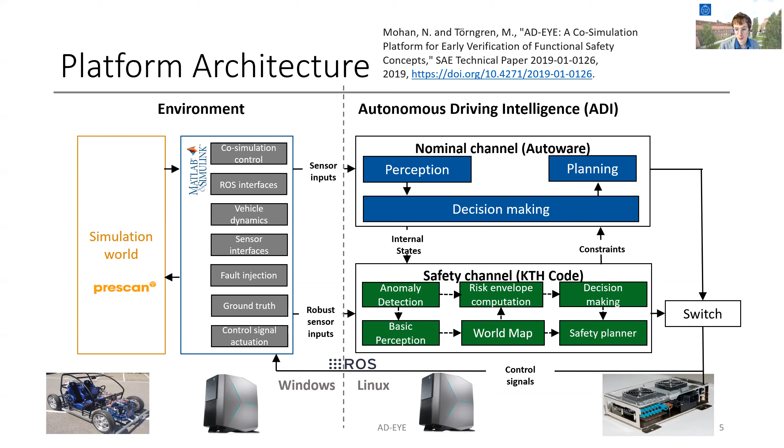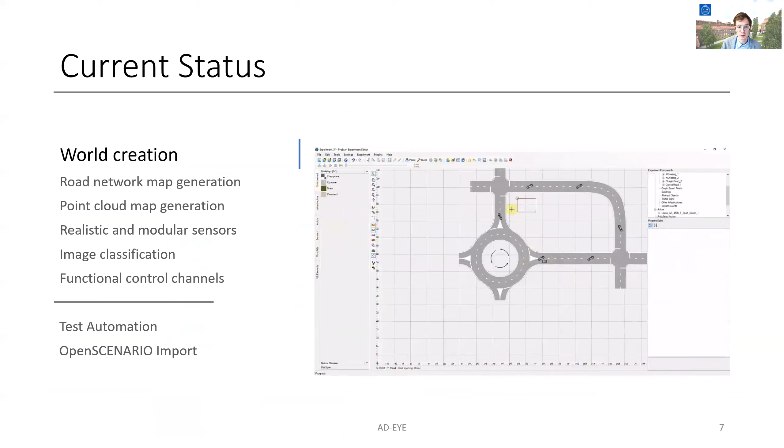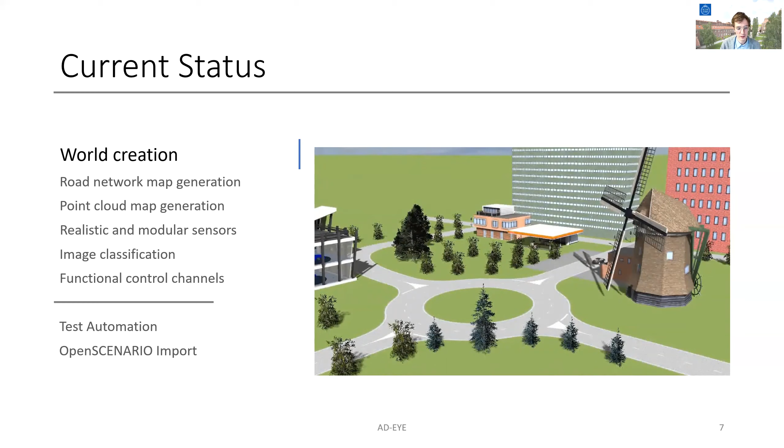With AD-EYE, we can create simulation worlds. The first way to create a world is to do it manually, as seen in the video, by dragging and dropping elements. This is an easy and intuitive way to create simulation worlds and scenarios and allows to prototype quite fast. The alternative, more automated, is to import simulation worlds.

As we can see here with a KTH campus that was imported from OpenStreetMap. So the left picture is the map in OpenStreetMap and the right picture is a simulation world as we can see it in our simulation software.

This more automated way of creating simulation worlds is more scalable, as we can generate hundreds of simulation worlds by doing so programmatically. Once those worlds are imported, they can also be manually modified and improved to get closer to reality, as we can see here with improved buildings and textures for KTH campus.

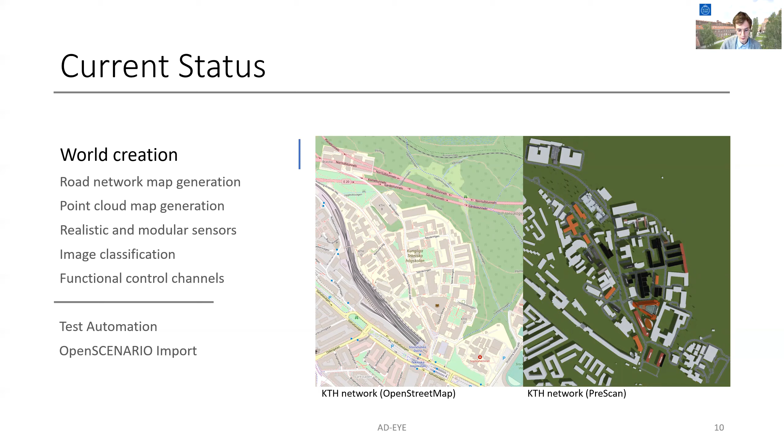Once the simulation world is created, using AD-EYE, we can programmatically generate two kinds of map. The first one, road network map, is a map used for navigation. So using AD-EYE, we can create this map in a known format, and it contains all the data useful for navigation, such as lanes position, direction, traffic signs, and traffic lights, and other. So this is one layer of map, and the other one is point cloud map.

The point cloud map is a set of points in three-dimensional space that is used for localization. This one can also be generated using the AD-EYE platform from the simulation worlds or from the real world, as we can see in this video, where the map of KTH campus is being recreated. Those two layers of maps are the only a priori knowledge that is given to the autonomous driving intelligence.

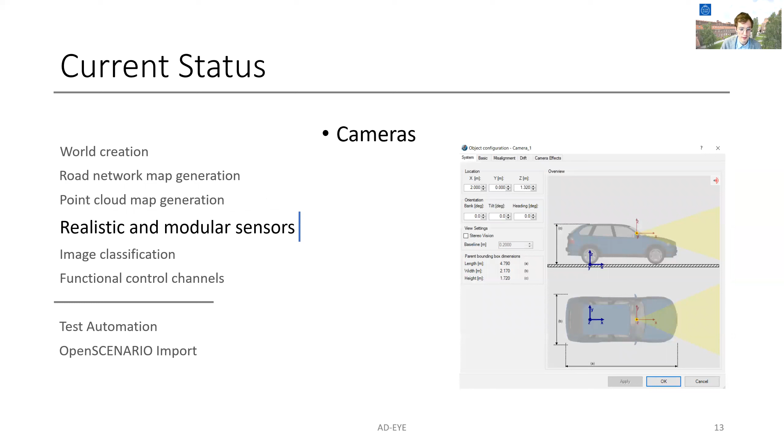The AD-EYE platform has support for several sensors, such as cameras, radar, and LiDARs. We have worked on image classification, and AD-EYE allows to generate big data sets using simulations, and we have used those to train a neural network to assign tags to detected objects.

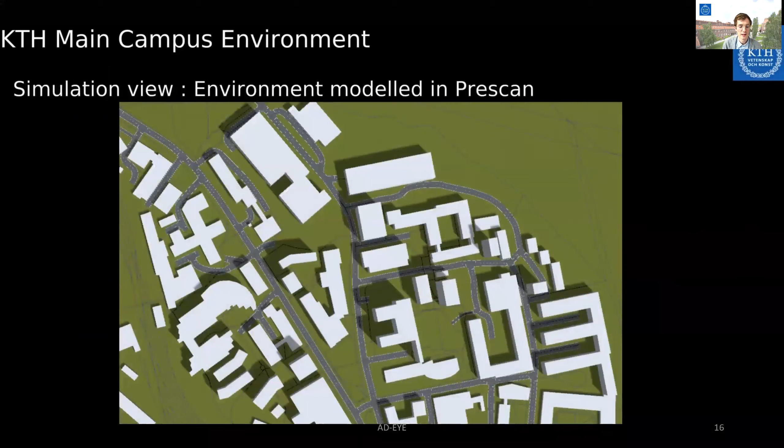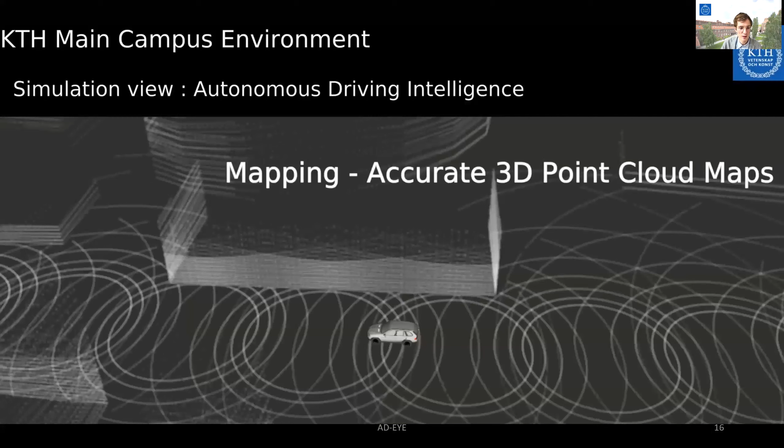We saw in the architecture that AD-EYE, and more specifically the autonomous driving intelligence, was composed of two independent control channels. In the following video, we are going to see how those two channels interact together and how to go from the creation of a world to running a simulation. So here we can see KTH campus on OpenStreetMap and its digital version, digital twin, with the Ego vehicle here in the simulation software.

Now we have switched to the autonomous driving intelligence point of view, where we can see the two layers of map that I mentioned previously. The white points are representing the point cloud map, while the white lines are representing the road network map used for navigation. And those two are the only a priori knowledge given to the autonomous driving intelligence.

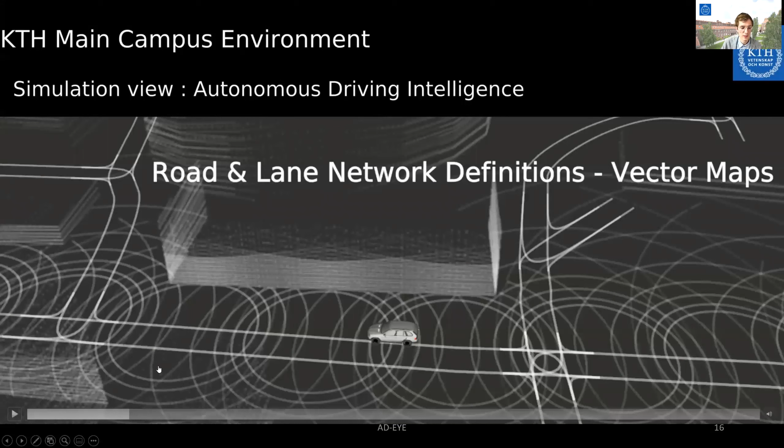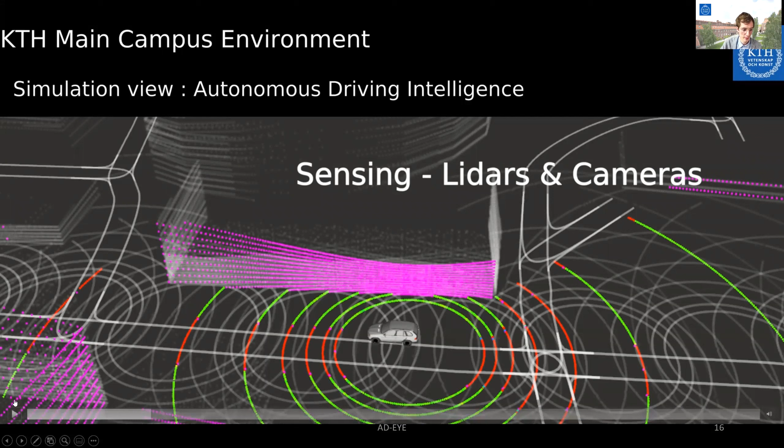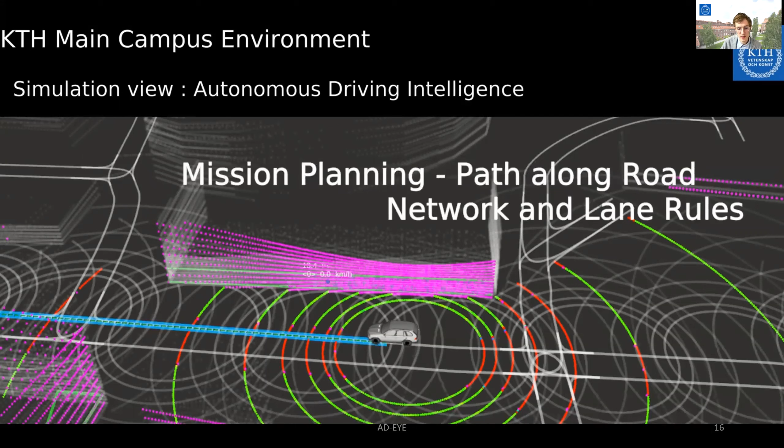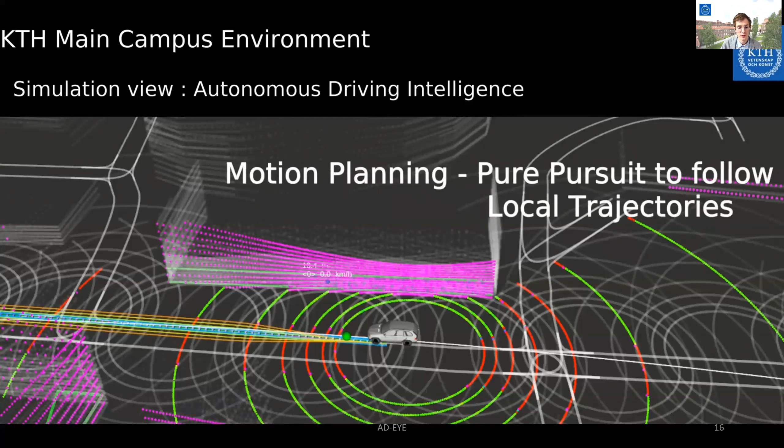What we see now, on the other hand, those color dots represent the LiDAR data, which is real-time data. And based on this data, we can perform some detection, some clustering, some localization. We have 3 layers of planning: global planning, local planning, and motion planning. So all this is part of the nominal channel. And we will see now an occupancy grid, which is the representation of the surrounding environment by the safety channel, which is simple by design.

So now our Ego vehicle is driving on KTH campus. The blue path that we can see on the left side of the video is the global path, while the yellow and red trajectories are the local trajectories.

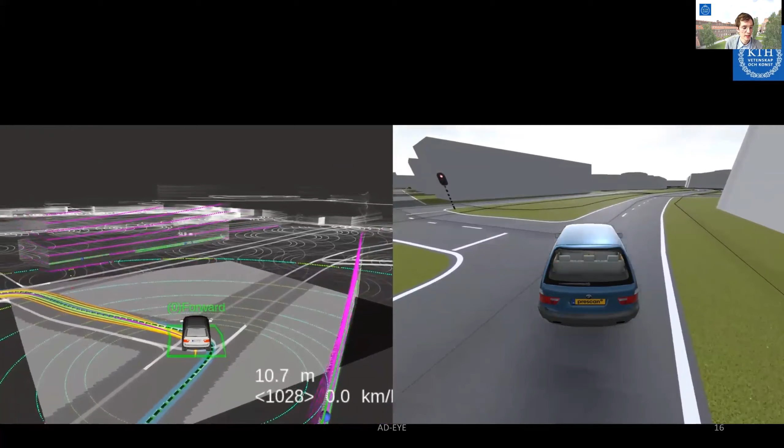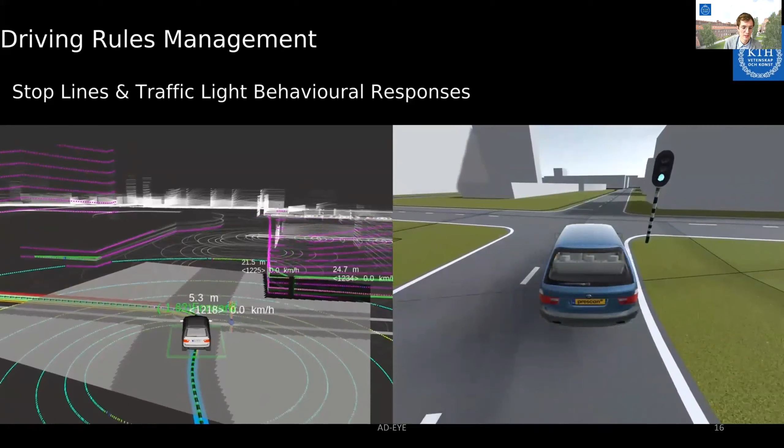Here we can see an example of an added infrastructure. Indeed, there are no traffic lights on the actual KTH campus. But using the AD-EYE platform in simulation, we can add new infrastructures and see the impact not only on the environment, but also on the system. Here, in our case, the Ego vehicle stopped as the traffic light was red.

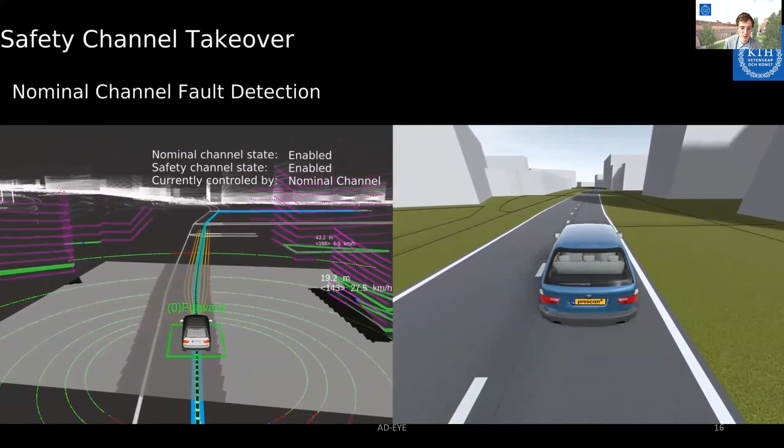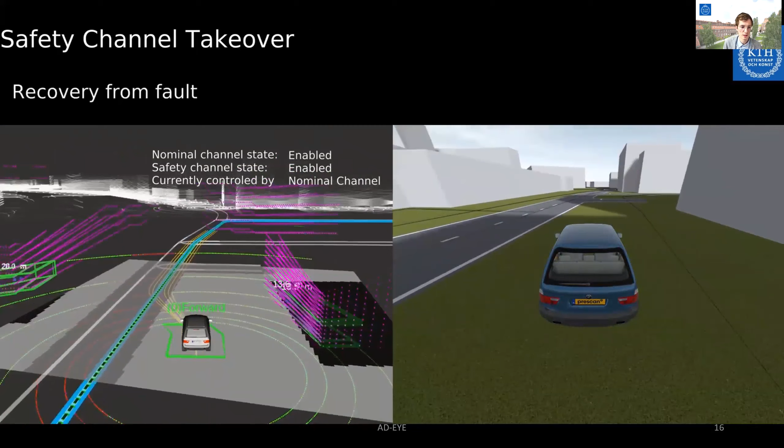Now we are going to generate a fault in the LiDAR sensor, and as this fault is detected, the safety channel performs a safe stop maneuver. And as we recover from this fault, the nominal channel will continue driving.

So I want to emphasize the difference in purpose between the nominal channel and the safety channel. The nominal channel aims at reaching a goal, while the safety channel monitors the nominal channel and makes sure that it stays within a safe operational envelope.

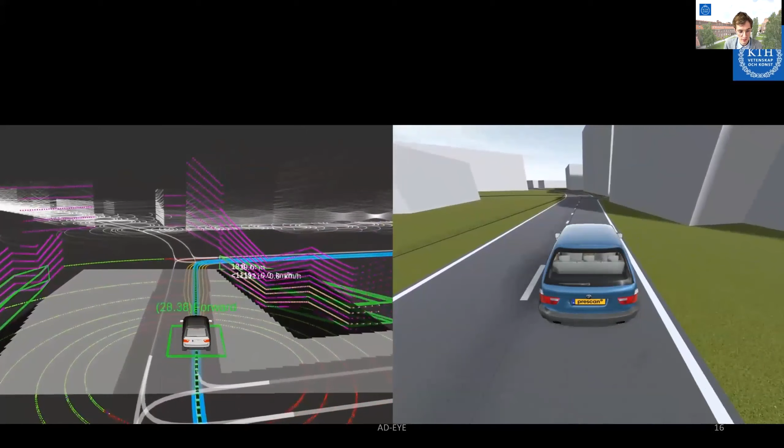So now we have seen how to run one simulation, but using the AD-EYE platform, we can run thousands of simulations thanks to test automation. So with test automation, we can run multiple simulations with different parameters. We currently support over 100 parameters, and in this video, we are going to see a small subset of the parameters that can be changed.

So we can change the simulation world, and we can change, illustrated here, the weather condition from sunny weather to foggy to rainy.

Furthermore, we have implemented support for OpenSCENARIO. This provides more maneuverability, as we can control the behaviors of actors and how they interact together, but it also provides an easy way to specify the scenarios we would like to run.

I'm going to describe one scenario here. There's currently research being done about the disturbance on LiDAR sensors, and AD-EYE is contributing with the experimental part. One of the scenarios we are running for this experimental part is illustrated here. The ego vehicle drives in its lane, and further on the road, on this side of the road, there's a pedestrian that, once close enough to the car, will start walking until the middle of the lane.

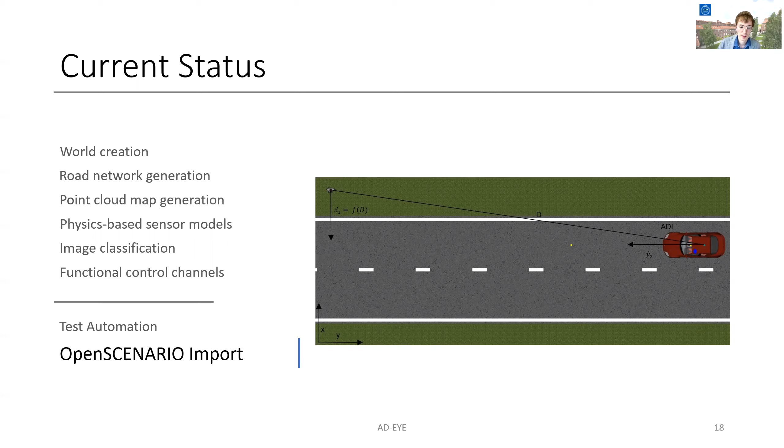The purpose of this experiment is to measure the disturbance of rain on the functionality, that is object detection, performed on the LiDAR data. Here we are going to see two different runs. Some of the parameters we can change between those thousands of experiments that we are running are the speed of the ego vehicle, the distance at which a pedestrian will start walking toward the middle of the lane, and the rain model parameters.

Here we saw the ego vehicle had a low enough speed and the pedestrian started walking far enough, and the ego vehicle managed to avoid an accident. With this second experiment, we can see that with a faster speed and with the pedestrian starting to walk later, the ego vehicle has an accident with a pedestrian. So that was one example.

Now that we know what can be done with the AD-EYE platform, let's have a look at its future plans. Here we can see a timeline of the projects AD-EYE is part of. Some I would like to mention are InSecTT, in which we will focus on security, Campus 2030, in which we will focus on infrastructures, and TECOSA, a research center, in which we will focus on edge computing. Those three will lead to a shift from AD-EYE focusing purely on automated driving to AD-EYE aiming at becoming an intelligent transport system testbed here at KTH.

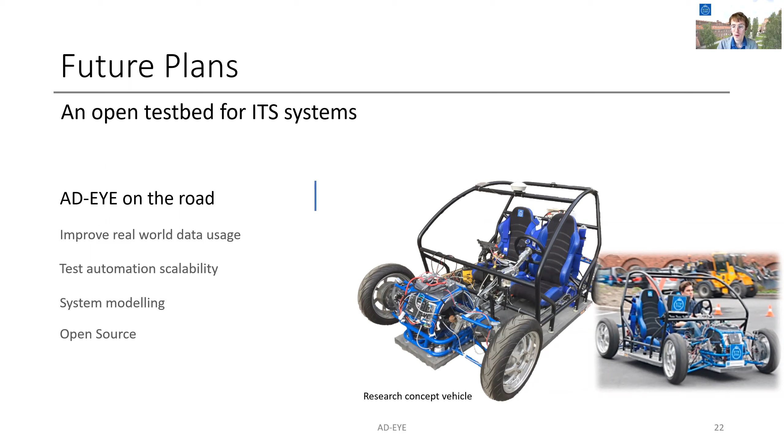To do so, we are currently working on real-world usage. AD-EYE has been ported to the NVIDIA Drive PX2, and the goal is to have it running on a real vehicle. We have an open application at Transportstyrelsen, the Swedish transport agency, to be allowed to drive autonomously on the road here on the campus. As we'll be able to perform more real-world experiments, we'll also gather more data from the real world. And we want to use this increase of data to improve the fidelity of our models, to improve the simulation worlds, but also to improve the motion prediction for other actors, such as cars or pedestrians.

We are working on increasing the scalability of test automation. Right now, we can run thousands of experiments, but we would like to run 10,000 experiments. And we would like to be able to move from the single computer that we have here physically to clusters, such as the clusters that we have here at KTH. This would free resources; those computers that we have physically, we would like to keep them for development. And it would also allow us to run more tests and perform a more in-depth safety analysis.

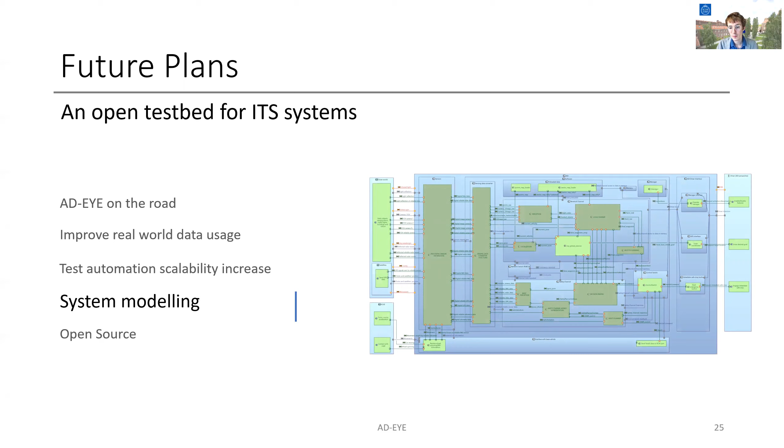We are working on modeling the system, as you can see here, with a model of the AD-EYE platform done in the open source tool Capella. This modeling allows us to do safety analysis. AD-EYE aims at becoming open source, not only with the code, but also with the safety case and the methodology. All those elements combined, and adding the fact that we have 5G here on KTH campus and that we'll focus more on edge computing, AD-EYE aims at becoming an open testbed for intelligent transport systems.